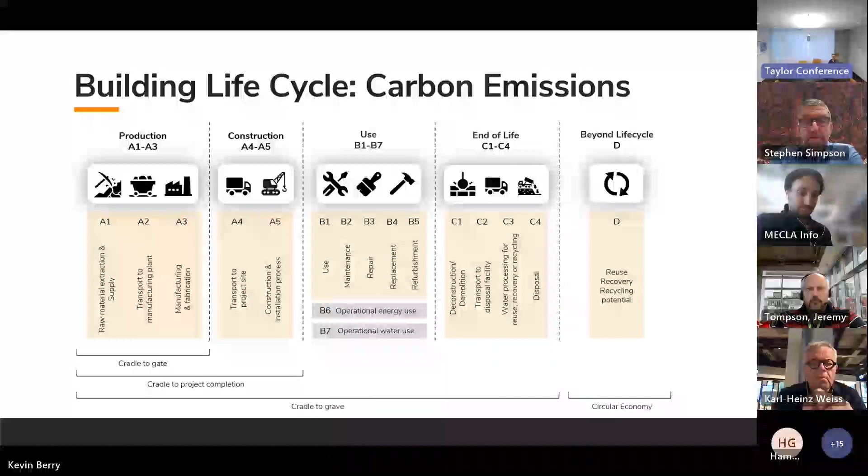To frame the challenge and put the spotlight on structural engineering, buildings account for around 28% of global greenhouse gas emissions.

If you think about a building as it stood in 2019, about 84% of that energy was related to operational carbon, and only 16% was tied to the embodied portion. Of that component, 12.5% was actually the constituent materials that make up the building.

So it's not a hugely significant part, which is why we have energy efficient fridges, insulated buildings and things like that, just to try and improve the operational component.

But if we fast forward to 2050, we have this amazing green energy efficient grid, and all of a sudden the tables turn. The embodied carbon proportion of buildings is projected to be 85% of the building's total greenhouse emissions, and within that embodied portion, 78% is related to that production and usage stage.

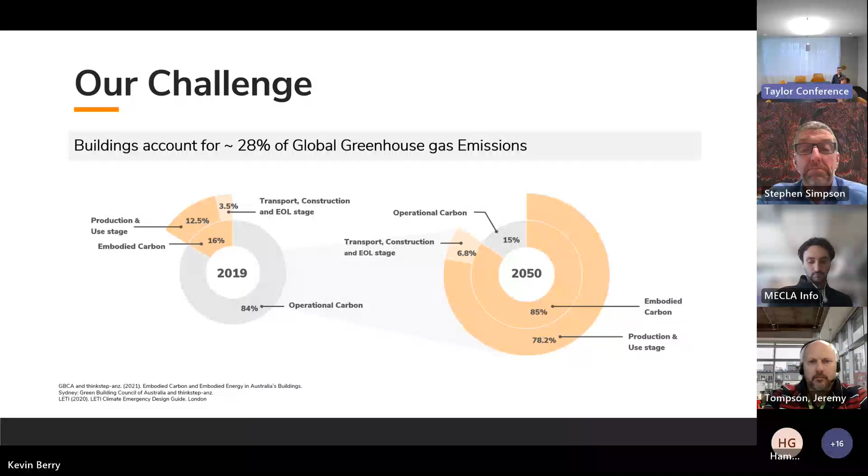If I drill a little further into that and shine a lens on what TTW does as structure and facade designers, you can see in 2019 terms, structure only contributes around 8% of that total emission. So we're roughly 65% of the total production phase sits in structure.

But as we launch into 2050, about half of the total carbon is related to structure, and of that production phase, it's sort of 65% again. So there's going to become an increasing demand on us as designers and engineers to try and address that component.

We're already starting to see a lot of work around certification schemes adapting to push towards monitoring embodied carbon, in addition to the operational components they've focused on for the last 10, 15 years.

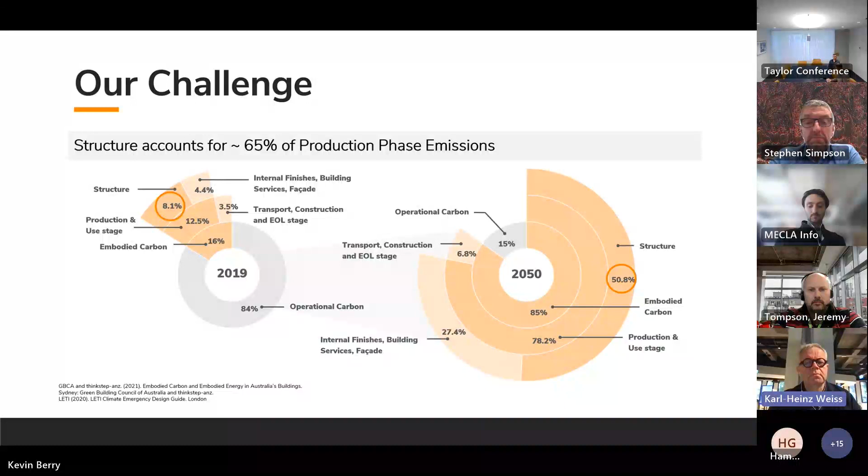So to jump into the timber space, because not all of the approaches are created equal, I thought this graph, which I've borrowed from the IStructE, is a particularly useful one.

Let's forget about the concrete and composite things for now, they're sort of muddying the water. But if we start by looking at timber 1, and we start at 0 years, we see this initial expenditure of embodied carbon associated with the harvesting, construction and manufacturing process of the material.

Things that can also impact that include where the power is sourced from, types of machinery utilised, and the efficiency of that. Once the material is actually made, you then start to move into the usage period of the building over the next 50 years.

In a normal scenario, that timber is hopefully sourced from a sustainable plantation, and the timber that's chopped down is replanted, so there's an ongoing extent of absorption that occurs until the next harvest. At the end of the project cycle, the building is demolished, and more often than not, that carbon is released back into the atmosphere, which accounts for the spike you see at the end.

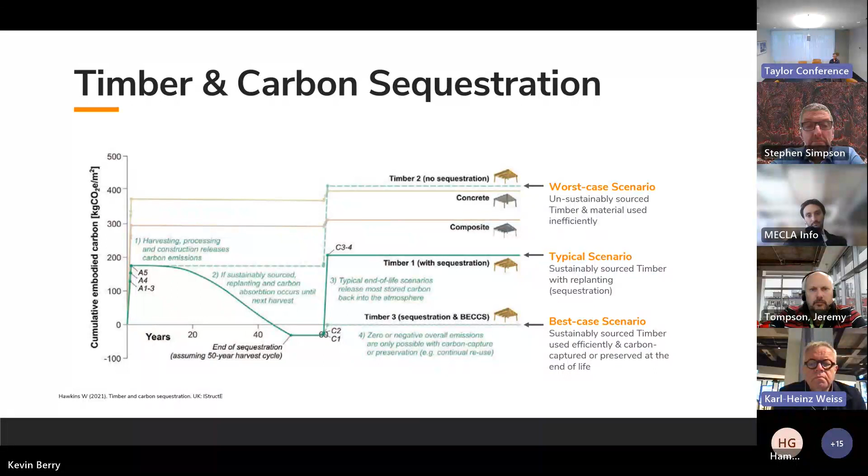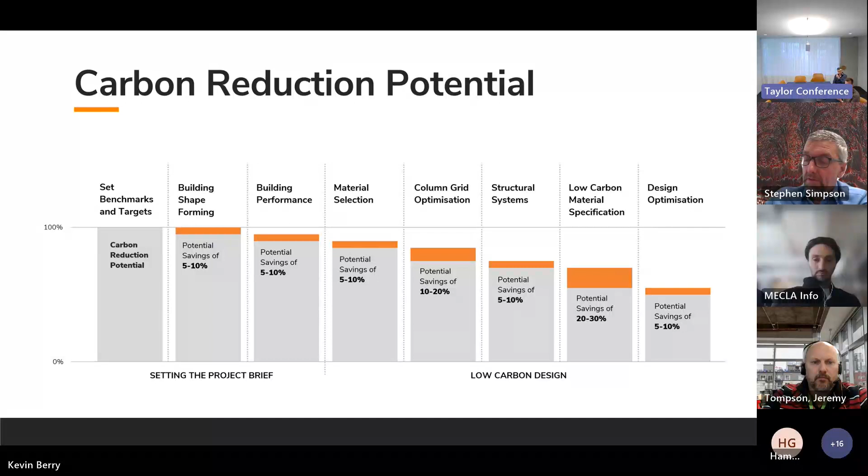Once we've done those first few things, then maybe we start to think about what we build the building out of. The material selection needs to respond to those other components rather than just jumping to an answer. We're big advocates of using the right tool for the job, and timber has a number of amazing attributes that can be exploited, but it needs to be done in a way that leverages all of the benefits of timber. A concrete building and a timber building are going to have different spatial outcomes, so being cognizant of that in the way we're selecting materials is very useful.

Once we've done that, there are more basic things we can play around with, obvious things like grid optimizations. They can have significant impacts again around the level of sustainability within our design. People frequently overspecify grids, commercial grids. We can see 16 by 10 meter grids specified pretty consistently, and then you might see meeting rooms or offices located through, so you're specifying benefit that you don't really need.

Once you've done all of those steps, then you have the choice to start to look at low carbon material specification. I think it should be a choice and an additional benefit, rather than forgetting about all of the basic design things we should be doing right as an industry, and then trying to make up for that approach with a silver bullet and a high performing material.

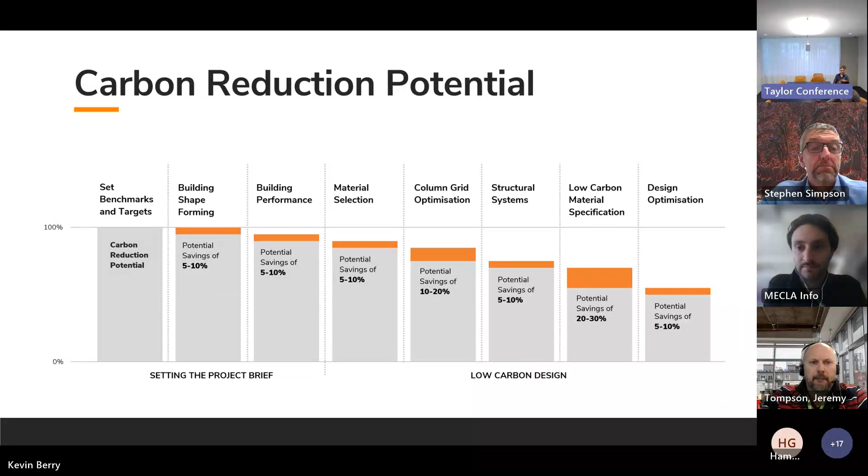The other aspect which is key to driving the level of embodied carbon within our buildings lower is around education. TTW, like a lot of other consultancies, is leveraging itself into trying to actually measure and monitor the level of embodied carbon across all of our projects. It's important because if we're able to visually display the impact of design decisions throughout the evolution of a project, then we'll start to actually inform behaviours that people will intuitively drive towards lower carbon designs.

So we push data-driven decision making. We then utilize that data to allow ourselves to critique our projects. We can benchmark against other jobs we have internally, and we can also test alternate systems, grids, etc. in real time. It's something the industry seems to be doing pretty consistently across the board, and we think this education piece will go a long way to driving those behaviours in the right direction. It will naturally put sustainable products like mass timber on a bit of a pedestal.

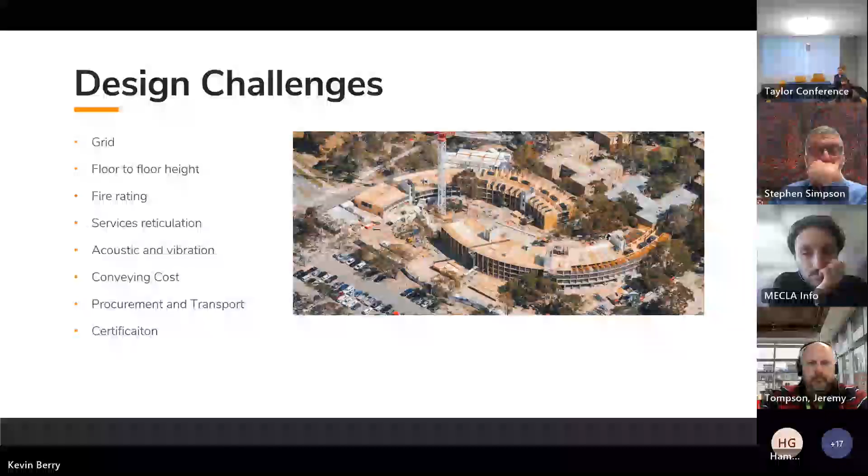So any questions on that component before I jump into design challenges? You're all very quiet. Yes.

Alistair? Just a quick question on the data you're using, a couple of slides back when you were doing the comparison of the different materials and their systems. Are you using process-based EPD and LCA type data, or are you using input-output and hybrid type data to get your values?

So I asked my sustainability team that this morning. I believe the bulk of that data is EPD based. What I can do is link back to our internal team, and then we can provide a little bit more information around that. But it's a bit of an aggregation, I believe. Some of our data will come from like Transport for New South Wales, they have pretty coherent information, and then where it's not relevant, particularly around things like mass timber, I believe they try and utilise general EPD information.

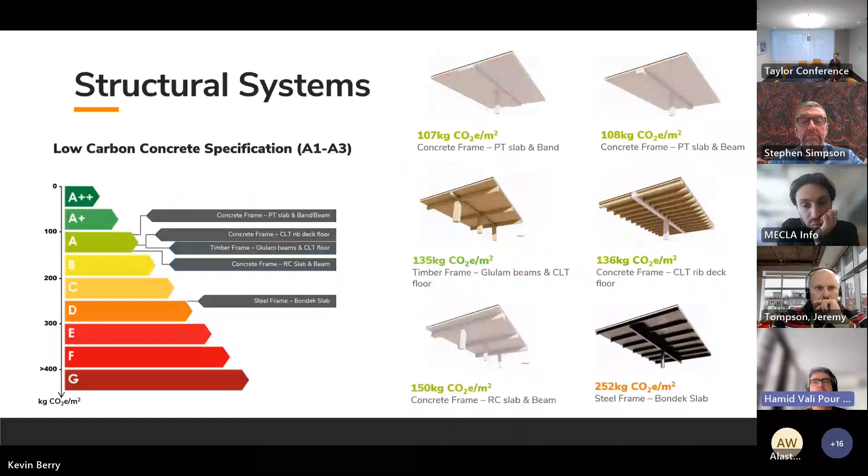Yeah. Hamid? Yes, Kevin. I have a quick question about the comparison you made between different structural systems. Would you be able to tell us the number of stories? Because I believe the height would be a big factor in terms of how each of these numbers are coming out of the calculations for embodied carbon.

They absolutely will. Obviously the column size will be impacted pretty directly, but on very tall structures you also gain floor stiffness advantages through larger columns as well. I will double check, but I would suggest they're actually just looking at the horizontal component of the element, because it would need to be, you know, like for like.

Okay, and I'm just curious to know whether you have also done any cost analysis on each of these alternatives, because that was something I believe one of the subgroups, the one on financials, would be interested to look into possibly, and I believe it's a big factor in adopting timber or some sort of timber composite versus other structural systems or construction materials.

Yeah, we're pretty consistently asked around cost. We're slightly apprehensive to do that given the industry of QSs in that space. But the challenge with cost is that if you're purely just looking at the materiality of it, you're not doing a product like timber anything like the justice it deserves, because you're limiting it to structure for structure, whereas timber has program benefits, it has follow-on trade benefits. There's a whole lot of other things that need to be looked at holistically as well. But structure for structure, the work we've done, I think we're generally seeing it's a slight price premium if you're looking at a timber structure over a concrete one of around about 10%. Obviously they're all different given the demand and requirements, but that's if you're only looking at structure for structure, and I think it's the holistic argument which is the one that systems like timber need to make, in my view.

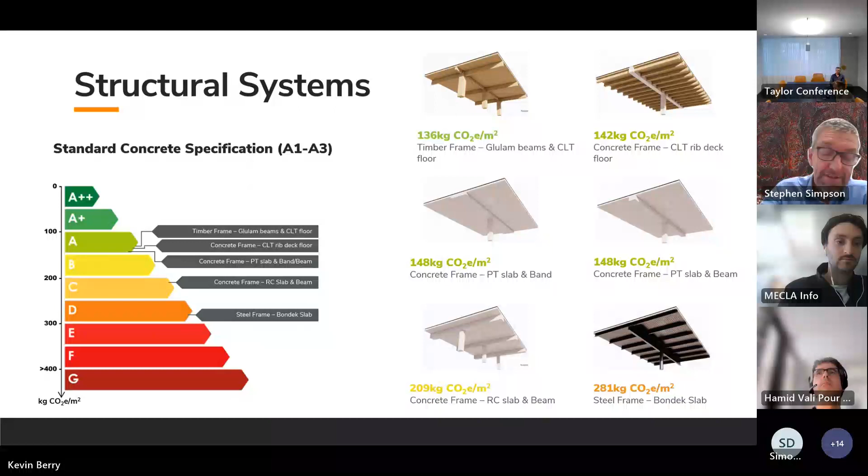All right, I'll just press on, Kevin, if you're okay. Paolo, if you can unlock your mute, go for the question, but we'll proceed.

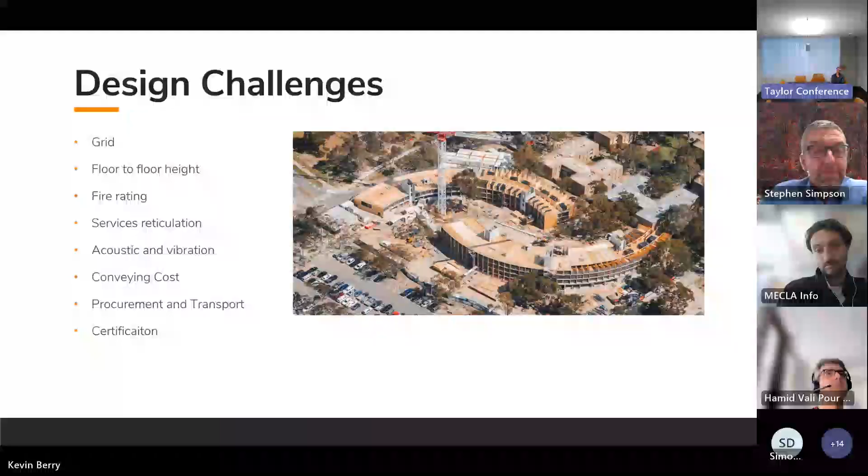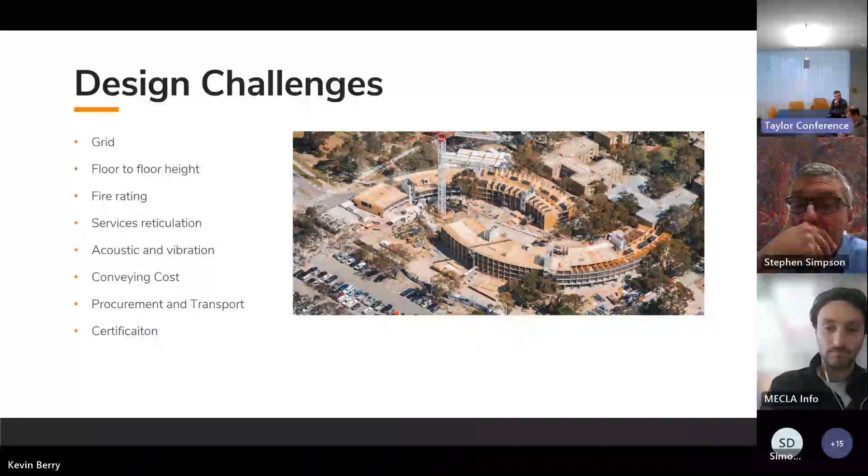Right. So what I was going to talk about now were some of the challenges that we work through around timber design, getting our timber projects across the line, because there's a range of perceptions more than reality that we battle on every project. Alex and I will talk through a few of these key points and some of the steps we take from procurement, and you can see how they might tie into earlier conversations around things like grids or general efficiency.

Kevin, just remind me, are you going to touch on end of use and reuse, recyclability? I very briefly mentioned it at the start, but no, it was more A1 to A3, because I think we've got to get that right before we push into the reuse component, in my view. But I'm happy to talk generally about it if people are interested. Yeah, toward the end we'll have a look at Paolo's question in the chat.

Do you want to give a little overview here? Yeah, so from a supply chain perspective, we're broadly talking about CLT and large cross-section glulam, so all of the mass timber structures. Within Australia, there's XLAM Australia that have been established for quite a while now. In the last couple of years, CUSP down in Tasmania have popped up, but they're a more boutique CLT supplier that produce hardwood CLT panels.

I've noticed that Jeremy's on the call, so he can probably confirm the timeline, but I believe this year Next Timber will be operational with high-volume CLT and glulam production capacity in South Australia. It's a thumbs up from Jeremy. And in the glulam space within Australia, we've got Hyne Timber, largely from Queensland, and down in Victoria we've also got Australian Sustainable Hardwood.

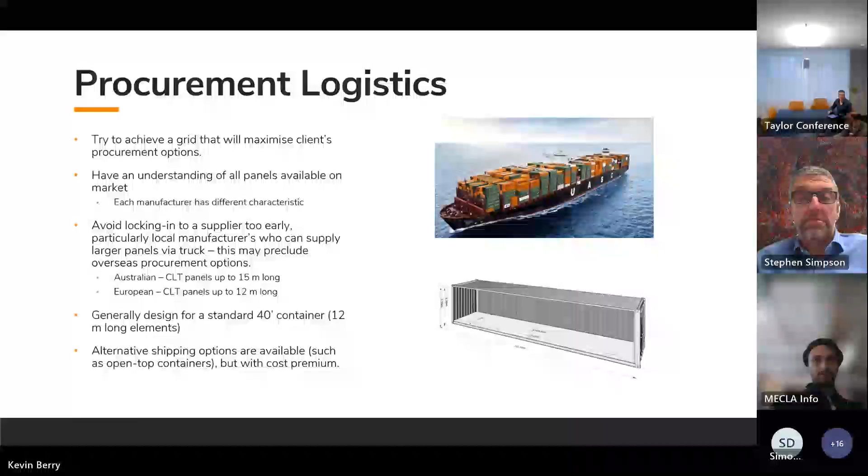And look, we'll touch very briefly on grid, which is tied intuitively both into shipping and procurement, and also sustainability. So, generally speaking, bigger grids are going to be slightly more expensive. The sweet spot we're still yet to really beat on mass timber commercial is that 6x9 type grid. It works fantastically from a containerization standpoint, it's pretty good from a piece count on site, and it's still a relatively low volume.

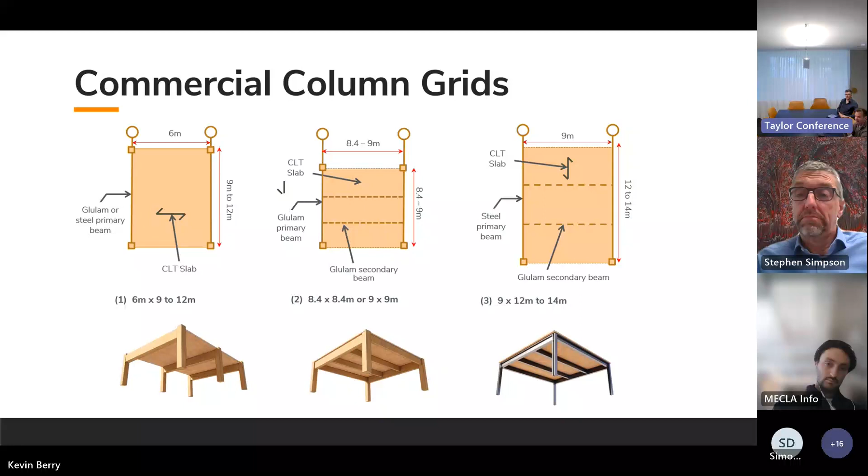We're having to start to substitute out some of the timber elements to try and get the spans, because the floor to floors on long spanning structures, particularly with mass timber, start to get challenged. We find once you go beyond 12 meters, it really starts to need a lot of volume of material to actually achieve those spans and control deflection.

So what we try and do is look at all of the alternatives. As Alex said, we're agnostic of supplier and things, but we also try and use the best material for the job as well. So if it's a long spanning type solution, we use the timber where it's most effective, and we use another material where it's most effective. So we see that using a material to its strength is always going to be better than trying to shoehorn it into something that it's not.

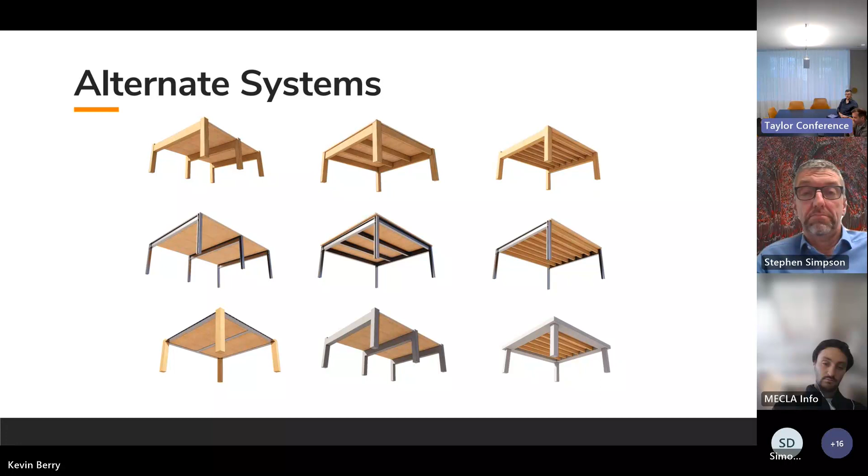Some of the technical issues, and these tie into a huge amount around efficiency of buildings, are things like service reticulation. When we're laying out a building grid, we're thinking about how we're going to reticulate the services. Timber, like any other material, you have the cost of the actual wood, and then it's all of the things that you do to it that incrementally drive the cost up higher. So if you can avoid doing work through penetrations and stiffening and notches, that's going to drive your cost down, from an economy perspective and also from a sustainability perspective.

So, little things like short grids coming out of the core to allow us to reticulate ductwork under beams are little tricks that we utilize to try and gain economy. I think you can see here, you can't see my cursor. Nice, you can. A short grid is a great tool for timber to actually allow for that reticulation without all of these large penetrations.

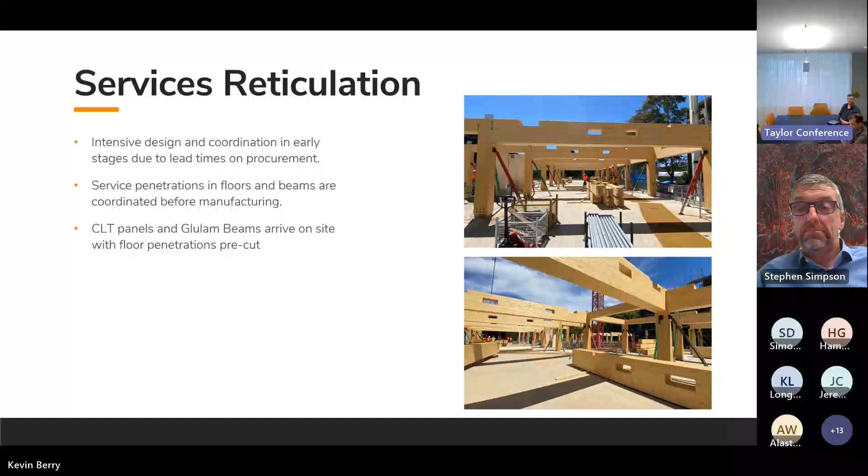Jeremy's got a question there, mate. Jeremy: It was really just an additional comment to what you're saying there, Kevin, particularly with service reticulation. From a detailing point of view, there's a lot of time and effort that goes into coordinating those penetrations, which can add time to the shop detailing process. So if we can avoid penetrations, that can certainly be of program benefit as well.

I think just to add further to that one as well. We spend quite a lot of time at the tender stage of the project coordinating with the architect and all of the services consultants to get penetrations in the right spot, and we're trying to beat them into submission into reducing the size of their ducts, and then the tender packages get let, and a different services consultant comes in to do each of their next set of disciplines or the next trades, and they've got a different thought on the strategy of how the services will work through the building.

Sometimes they can't even get the original duct size or things to work, and then you have to go through and do that whole coordination process again. So I'm quite a big advocate of trying to detail into the structure some nice clear corridors for the services to run, that just gives them completely free rein of doing whatever they want through there without really impacting the program and costs for the whole project.

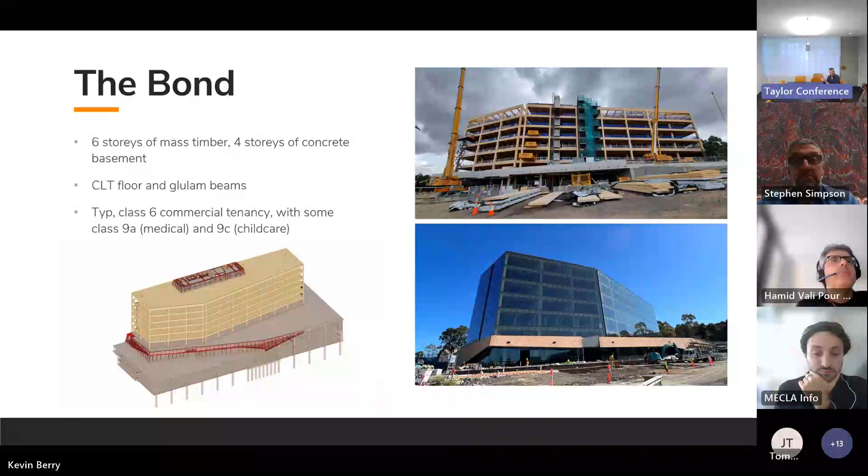But I think these are the few things that were touched on previously, but challenges for the project were an 8.4 by 8.4 column grid. And a driver for that was there's quite a lot of car parking below, and we wanted to try and avoid transfer structures as much as possible, therefore using less material. But one of the key things here was the 3.7 meter floor to floor height was a real challenge for this project with the column grid that we needed to adopt.

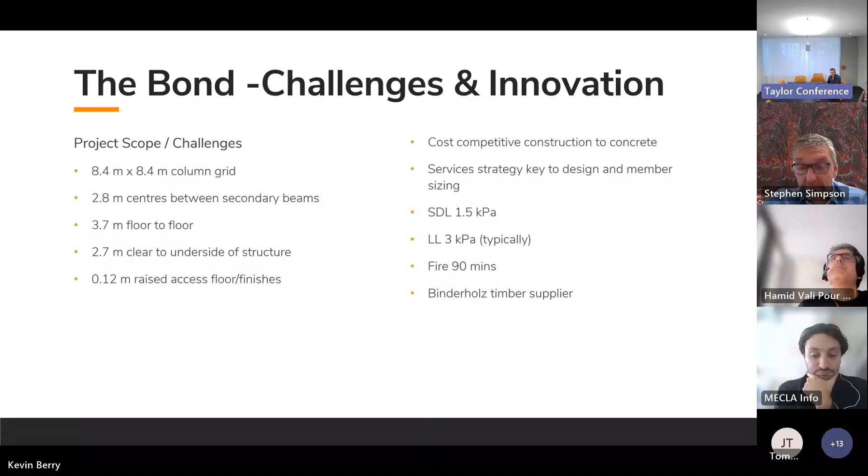I think also mixing into that, one of the challenges that comes into play is the 2.7 meters clear that everybody's trying to achieve from the underside of the structure or the ceiling zone from the finished floor level. So maybe that's something that should be also challenged on projects moving forward.

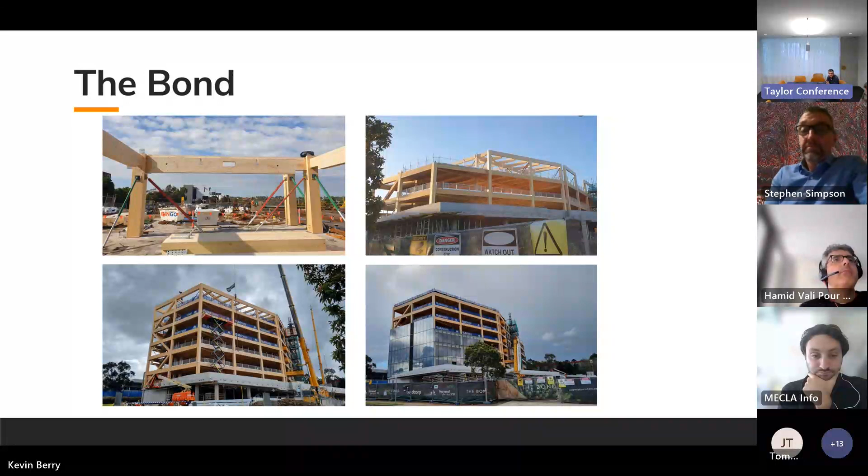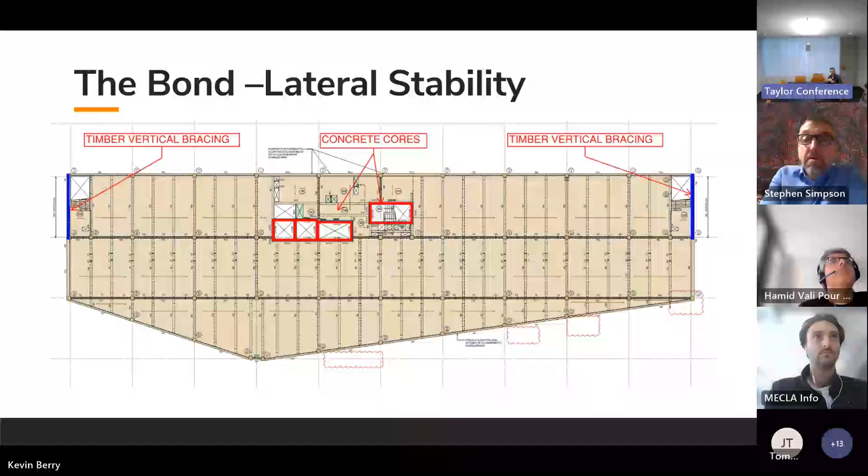The project as a whole is about 84 meters long, stabilized by 2 concrete cores in the center that were constructed out of AFS, and then 2 bays of feature bracing on either end of the structure that were made out of glulam. And you can see here on this floor plan that the front edge of the facade is angled, and you end up with 2 pinch points at either end of the building where you've got quite acute angles coming into one particular column.

The bracing strategy for this project was a little bit architecturally driven, but they were wanting to do something a little bit different than the chevron type bracing that you see on most mass timber projects. I think we worked quite hard to get this to work, but, you know, reflecting on what we worked through from a material and efficiency perspective, this is probably not the best response, because you end up using quite a lot of steel in these brackets and these connections to hold everything together. So if I had my time again, I'd probably use the carbon argument to help persuade the architects away from a response like this.

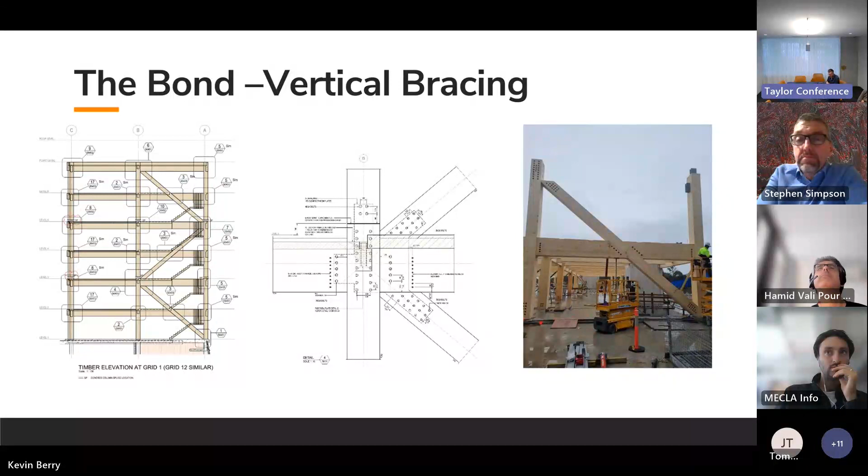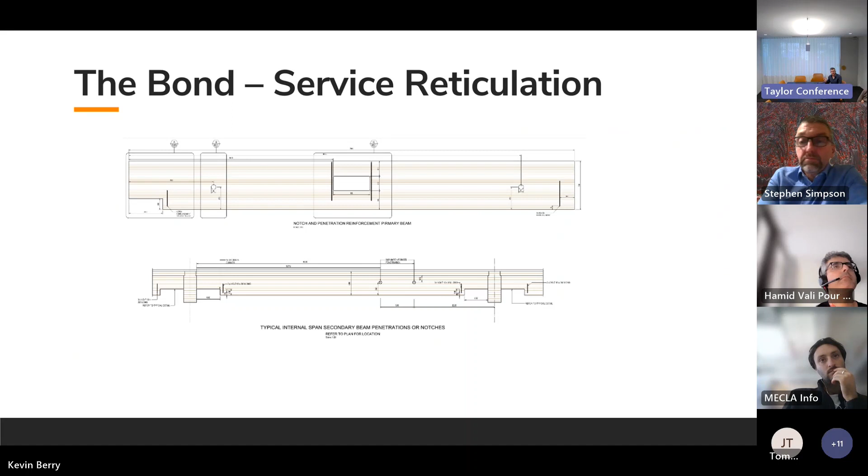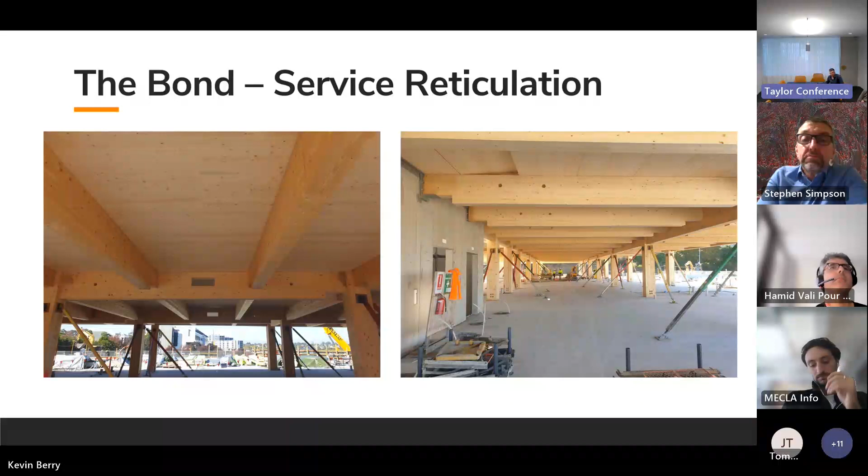So I spent quite a lot of time working through services reticulation for the structure and designing in notches and penetrations for the tender services set, and ultimately not all of those notches and not all of those penetrations were used, which is a little bit frustrating and disappointing. Just a couple of examples of what those look like on site. I don't think I've got any in here of what the finished product looks like.

But this is one of the things that we worked through on the Bond: we designed a fairly agnostic tender set of documentation. And once Binderholz, an Austrian supplier, were brought onto the project, we worked with them to refine the timber design based on what their actual supply chain was. But one of the things that really unlocked a bit of volume for the project was an allowable change in depth of the secondary beams.

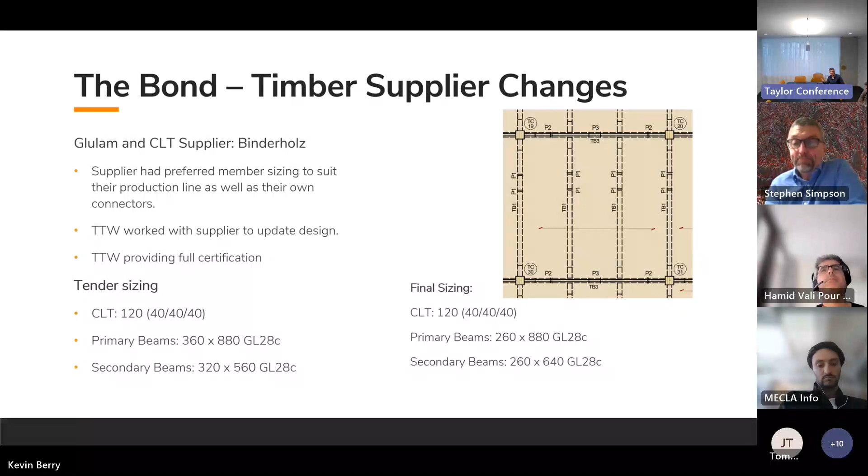So as we were working through the project, we were quite limited to the depth that we were allowed of the secondary beam at 560 mil. But it's amazing what you can challenge further down the project when there are dollars involved. So once the builder was appointed, once the timber supplier was appointed, and we could demonstrate that through using a deeper secondary beam, the architect and the client were actually able to yield on the structural depths that we needed to work to, which helped unlock more efficiency for the structure.